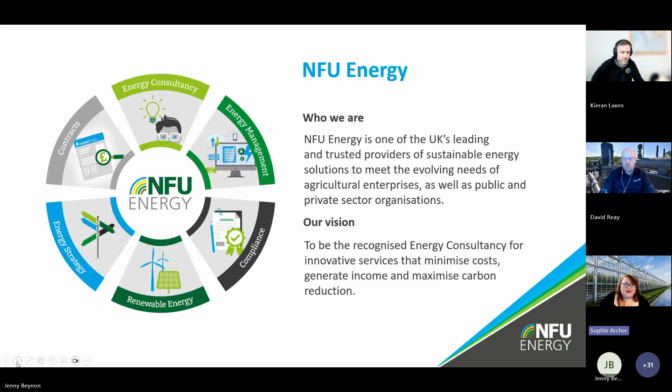Thanks. I have just requested to control the slides, so hopefully they'll come through. While that's happening, a quick introduction to myself. My name is Kieran Laxen, I'm a director at Calico Environmental Consulting. I've only got about 10 minutes to talk, so I'll be trying to cover quite a lot quite quickly.

The focus of the talk will be on AD operations which require permits rather than ones that have exemptions. A lot of it's going to be a super high level overview, in part to tee up the next presentation, so I'll mention some things that will then have more detail later. As with most things, the areas to cover are huge. A lot of the content will be focused on England, where the EA are regulators, but a lot of the concepts also apply to Wales, Scotland and Northern Ireland as well.

Have I got control? I don't think so. Could you do the next slide if possible?

Thank you. So just to say, teeing up stuff, super useful.

Just to mention, the purpose of permits is all about managing risk, trying to minimize it as far as possible, and that needs to consider various different concerns. The concerns are at a local level, considering the impacts on the area immediately around, so that's odor, water, noise, vibration, dust, aerosols, and air quality.

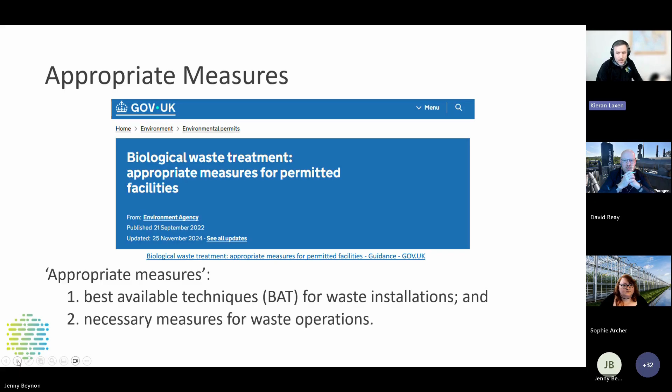Next slide. So what does BAT mean for me, or for an operator? Well, AD facilities are all required to adopt BAT, as we just said, but BAT has a series of emission levels that are required. So for any release to the atmosphere, water, ground, or surface, there are specific requirements that you have to comply with, and these are set out in various different documents.

The most useful ones are the BAT conclusions document and the waste treatment BREF document - these set out the good measures that you want to do. Those are currently hosted for the waste sector on the European websites. They get reviewed and updated periodically, and since leaving the EU, there are UK BAT conclusions slowly working through different documents - the waste treatment sector isn't quite there yet, but in future it'll be UK BAT rather than EU BAT. That BAT document's been around for quite some time now, since 2018.

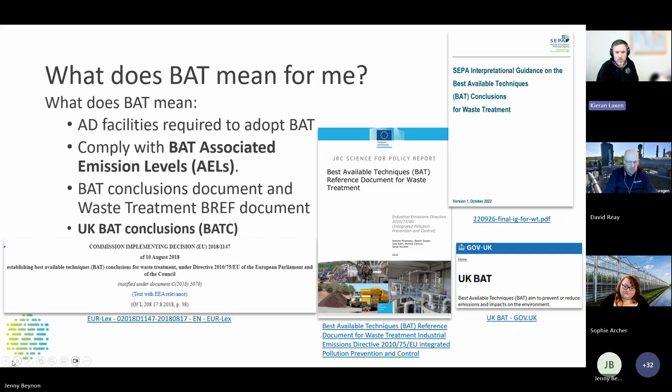There are some other useful documents too, like I've put down there - there's a screenshot for SEPA, the Scottish Environment Protection Agency, and their interpretation of BAT conclusions, which was in 2022. So it's just useful to be aware of what the most recent documents are. Next slide, if possible.

So I thought it was useful to say here, current priorities for AD plants. Now, emission control is obviously one of the big key things, and this covers things like continuous monitoring of methane and ammonia or CO2 emissions. It also covers digestate storage, making sure of gas-tight systems, or implementing advanced flares or biogas upgrading technologies.

Energy efficiency is another key priority for BAT, and this is about optimizing heat recovery, which is definitely highlighted a lot in the BAT conclusions documents.

Then there's digestate management. This is about improving handling and nutrient recovery for systems. When digestate leaves the site, there are secondary effects we make sure we're minimizing, so getting nutrient recovery is important there. There's also a circular economy agenda starting to suggest things like more just-in-time feedstock delivery to minimize the amount of feedstock given on the site.

And then I put down air quality and odor because they're things that tend to need to be addressed in a significant way. There's obviously other things like water and bioaerosols, but those two come up a lot for us.

One of the challenges we've seen, and the reason I put these pictures down, is actually a biofilter, used for odor abatement. The standard emission limits put on those are quite stringent and just generic. But biofilters give off a natural odor as well, so they can exceed those emission limits naturally. Often there's not consideration of how close the receptors are to the site physically, and it's the impact on receptors that matters. So sometimes you have to work to make those more appropriate to the site, but that's the purpose of the pictures.

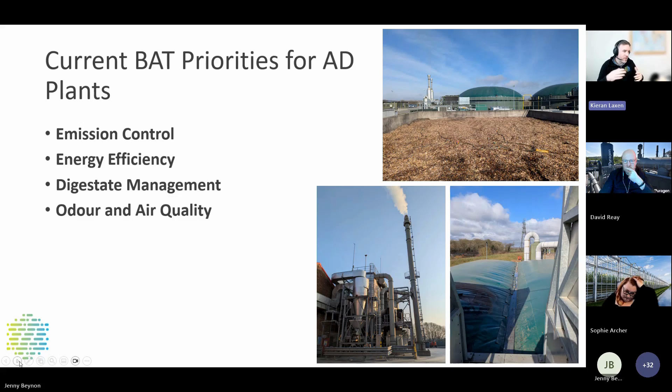Can you go to the next slide?

I thought this was quite a useful thing to mention. I've got a couple of quotes there which I'm not specifically going to read out, but we get asked questions, and for me the useful thing to say is that permitting is useful to consider as quite a binary thing at first. If something's written down in your permit, you can do it. If it's not, assume you can't. My experience is the EA and the regulators are pragmatic, and their objective is to minimize risk, but don't assume you can just do something straight away.

The fun during the permit application stage is that it's often quite a chicken and egg scenario, where as an operator you're trying to convince the EA that you're going to operate a site and it's going to be low risk, and the EA need the evidence to support that. But the details aren't always available at the application stage, so you have this slight chicken and egg scenario. The screenshot on the right is an example of a more bare bones set of evidence that's been submitted, which I personally don't think would convince me if I were a regulator that the facility is going to be low risk. So it's just about making sure when you're doing permit applications or providing information to the EA that you're giving them the evidence to give them all the reassurance they need.

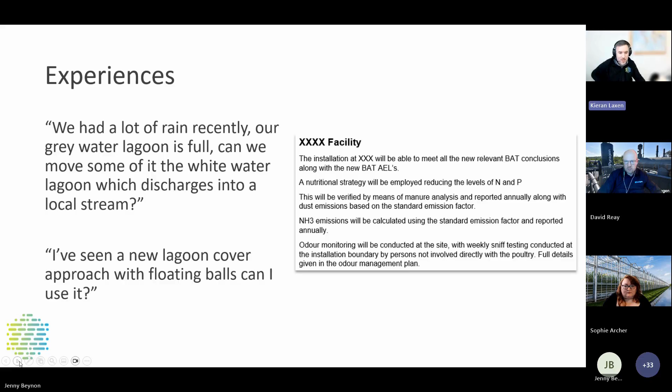Next slide, if possible. So coming on to consultations and updates - I'm conscious some of this is being talked about later, so I'm just mentioning it at this stage. There's a consultation out right now, it came out, I think, two days ago, about the requirement for site conditions reports and updates to guidance on that. This is my point about the goalposts changing - things do constantly get reviewed and updated, so you have to constantly be aware of what's going on.

There's what's called the H1 screening tool, used as part of permit applications to screen whether there's impacts on the environment. This is being updated at the moment and will hopefully come out soon. There's the decarbonisation readiness, which will be talked about later. Then there's standard rules permits - there's consultation on carbon capture storage for those, about whether they can be incorporated into standard rules permits, which would be useful. It's also worth mentioning the Environment Agency are updating the permit application process and management system, and having a new online website, which is hopefully going to become available in the future.

Next slide, if possible. So just quickly mentioning where I think we're going. Obviously hydrogen and carbon capture integration is happening - that's the decarbonisation readiness side of it, a big piece which will be talked about later.

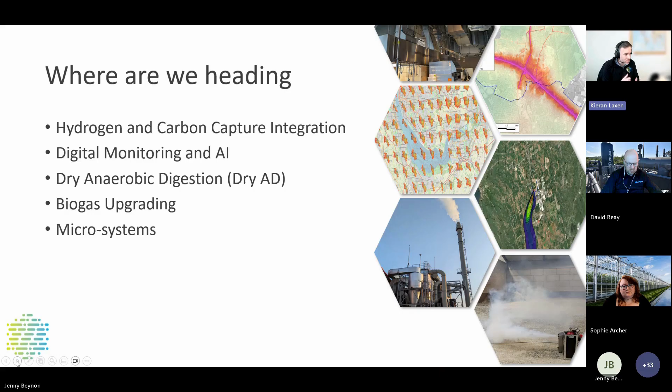That's something I've seen on the R&D side that will probably come through to the operational side as well. There's a move to dry anaerobic digestion, biogas upgrading systems, and the last one worth mentioning is microsystems. We're doing a lot more at the moment helping people where there's benefits in having a larger AD operation, but there's also more smaller ones potentially coming through, so it's worth mentioning that there's both ways we're going.

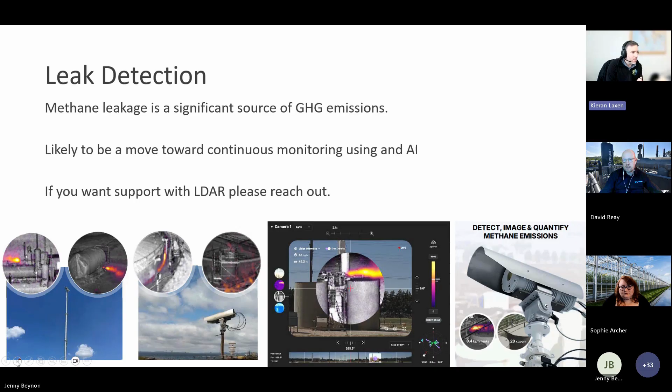I just wanted to mention leak detection. Methane is a significant source of GHG emissions, and I think this is going to be a bit of a focus for really minimising it. The biggest impacts, from my perspective, in terms of climate impacts, are from the leakage, and we work with a monitoring company that are very much moving towards AI and continuous monitoring systems. I think that's the direction things are going, in terms of understanding what emissions are and minimising leakage.

I kind of wanted to express that everything with operating an AD plant requires you to continuously improve and stay up to date - you can't just assume you've got your permit and you're doing the bare minimum to satisfy that. You do need to demonstrate that you are improving and doing the best you can, and there's obviously cost benefits of doing so as well. The links in the slides are there to point people in the right direction for knowing where the information is to keep up to date.

So I think that's the end of what I was hoping to say.

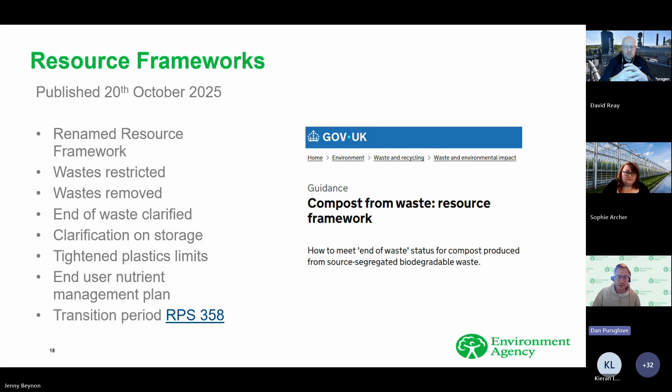The next significant change in the sector is that our standard rules permits currently don't allow the capture and storage of biogenic CO2. We published RPS 255 on this, which allowed AD operators who do biogas upgrading to capture the separated CO2, but we wanted to formalise that, and as part of the decarbonisation readiness work that Emma's going to talk about, we asked to include these changes in our standard rules.

What we're consulting on is adding new techniques to allow operators to do physical separation of CO2 and capture that. It has the same storage restrictions as the RPS - 6 months storage of CO2 and 150 tons at any one time. So it's a reasonable amount of storage for small to medium sites.

Mainly we're doing this because at the moment you have to get a bespoke permit if you want to do carbon capture. So it's off-putting for operators who want to operate standard rules but also want to do carbon capture.

The production of CO2 is not for the purpose of sequestration, it's for the use to be sold into the food and drink industry or other industries who may need carbonation resources. And importantly to note that this isn't a mandatory requirement, so it's a change to standard rules, but it's an optional aspect, so it's not a requirement for companies who operate AD to do carbon capture, but it's to facilitate that within the standard rules.

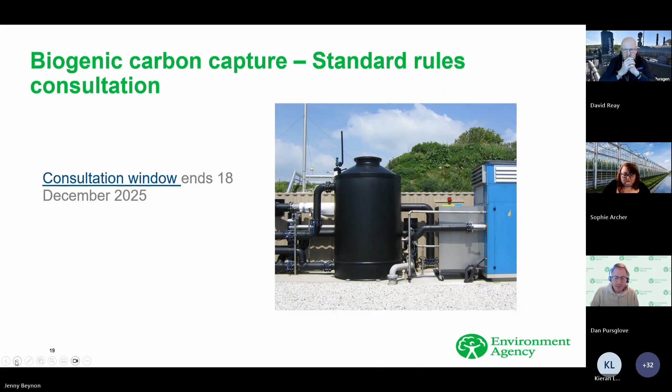DEFRA has consulted on modernising environmental permitting, and that covers a really broad range of aspects that Kieran touched on a little in his talk. But the key bit for you listening will be the proposal to bring crop-fed and non-waste AD into environmental permitting. So there'll be a regulatory legislative change to the environmental permitting regulations. That would likely be a Part A1 installation activity.

We definitely support this because the risks from AD facilities are similar regardless of feedstocks. You may have slightly different environmental challenges with different digestate, but they both still produce biogas. They both, if you spill digestate into a river, it's going to cause pollution. So we're pleased that it's being brought into regulation, hopefully.

Many non-waste AD activities probably take place at capacities below the 100 tons per day threshold, which is the current capacity size for a waste installation. So we've fed back to DEFRA that we'd like to see smaller capacity non-waste ADs covered by these reforms as well. That consultation unfortunately closed on the 21st of October, but hopefully some of you may have seen it from other sources.

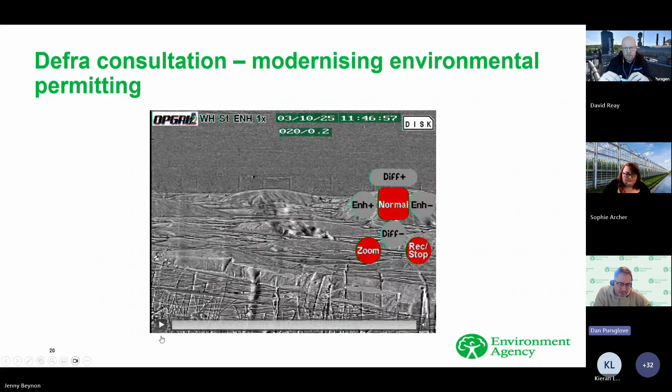Non-waste sites need to be considered on a par with waste. So amongst all the graininess, you can see bubbling in this digestate lagoon and venting of biogas, which poses a serious environmental health and safety risk. And that is currently completely unregulated.

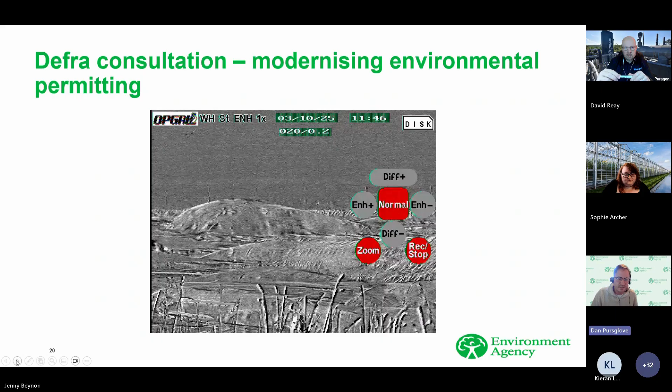Biogas leakage, expanding on the last point and on what Kieran said, the key and probably the biggest priority for us in AD is biogas losses, and it can occur from dome membranes, incorrectly operated pressure release valves, open digestate storage, leaks from flanges and pipework.

Some of you may be aware that DESNZ produced a document called the MEAD report, which stands for methane in anaerobic digestion. That was last year, and it included a study which assessed methane leaks from AD. Most of these case studies were from agricultural plants, so crop-fed, manure or a mixture. And it found that losses of methane ranged from between 4.1 and 14.2% of the methane produced in those 8 individual AD plants.

Biogas is invisible. Operators won't know it's happening. So Jenny, could you press play, please?

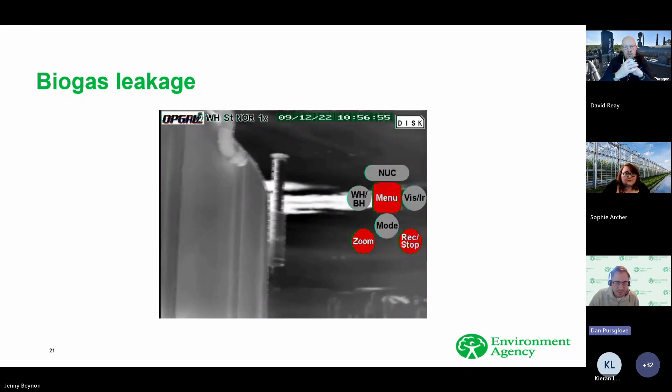Just to highlight some of those losses, this is methane emissions using, again, an OGI camera, leaks from pressure release valves, which have inappropriately been activated while the CHP was down. So these sort of gases should be going to the flare in these emergency situations rather than venting out the top of the tank. There shouldn't be any venting of gases when it's not safety critical, but sometimes without the sort of leak detection and repair checks, you don't know that this is happening.

And it can be quite significant losses of biogas, which is a loss of revenue. At the end of the day, it's a loss of what you're doing the AD for, to generate a gas that you can combust, burn it, get the electricity, and even upgrade the gas into the grid.

So yeah, just to re-emphasize the importance of the leak detection and repair aspects of the permitting. And even if you operate a site which isn't regulated at the moment, doing the leak detection and repair aspects would be very good practice for you to prevent losses of methane. And that's it for me.

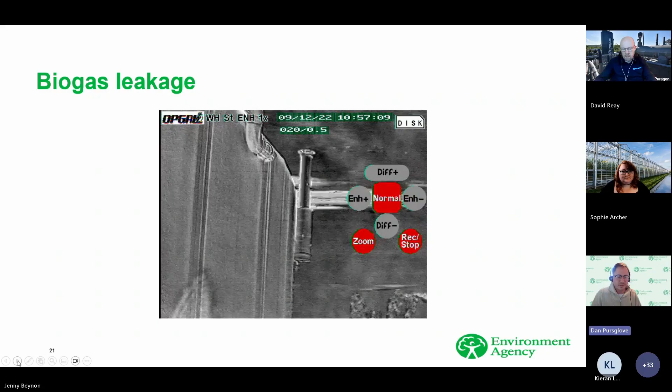Thank you. Good morning, everybody. My name is Emma Preston. I'm a senior advisor and project manager, and I'm responsible in the Environment Agency for the implementation of regulatory controls relating to medium combustion plant and specified generators. It's a very big and complex topic, and I think I've only got about 5 minutes left, so bear with me. I'll try and trot through this as quickly as possible.

I think the key thing I want to get over is to highlight to you the relationship between use of biogas as a result of doing AD activities and in combustion plant, which often follows that activity, and just make you aware of what those requirements for permitting and compliance are. So we'll just move on to the next slide, please.

So the requirements for controls on emissions from medium combustion plant comes from the Medium Combustion Plant Directive, and that was then enacted into law through environmental permitting regulations. It requires medium combustion plant and specified generators to be permitted. So this slide is talking about specifically medium combustion plant and which ones of those would require a permit.

So if you've got a plant that's got a capacity of more than or equal to 1 megawatt thermal and less than 50 megawatt thermal, burning any fuel, in this case most likely biogas, then it would fall into the requirement for a permit. Those operations can be static or they can be mobile plant. They can include backup generators for emergency use.

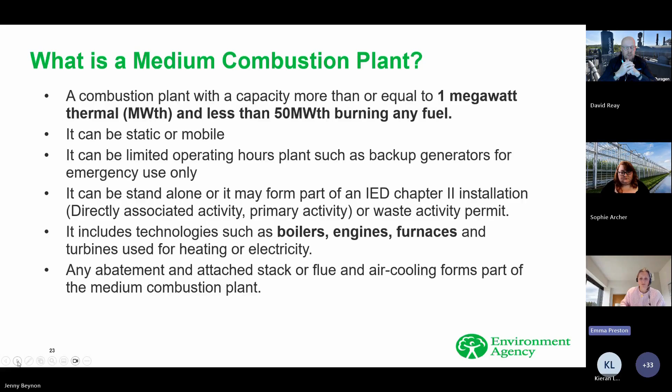So the sorts of combustion technology we're talking about here, probably with AD, mainly boilers, engines and CHPs, which is the combined heat and power. And sometimes they're for heat and sometimes it's for electricity. Any abatement that you've got associated with that, stacks, flues, air cooling, that all forms part of the medium combustion plant that we're looking to control. We'll just move to the next slide, please.

So who might need a medium combustion plant permit? I've put up a number of different questions. This is quite complicated, but first of all, I would recommend that you determine whether you would actually be excluded from the requirements. For example, if you're only burning poultry litter, they are excluded, or if you're doing direct heating and drying, there's exclusions that apply in those cases.

It's also a good idea to work out whether your plant is new or existing. If it was installed before the 20th of December 2018, it's what we call existing plant. And if it was after that date, it's new. If you substantially refurbish your older plant, and there's definitions of this on our website, you may then start to become a new medium combustion plant. So it's worth watching out for that.

Understanding what your capacity is really important. We use input capacity in megawatt thermal using net calorific values, so input capacity rather than output capacity. That's a common mistake that's made. So if you're not sure, you can go to the manufacturer of the combustion plant to determine that. Sometimes it's on a nameplate. There's various ways of working out that, and we've got some guidance on that on our website as well.

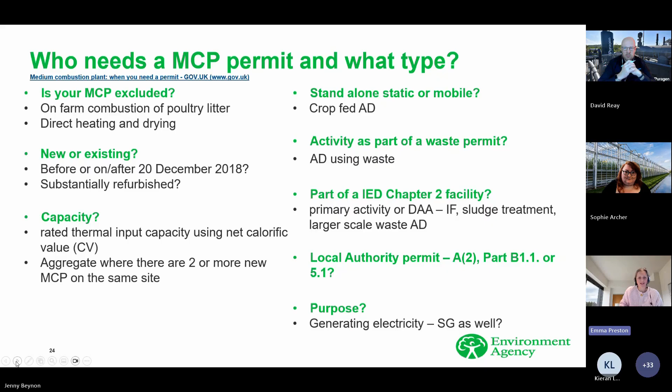What's important here is whether your medium combustion plant is generating electricity or not, because you may also be a specified generator. I'll now explain what a specified generator is. These are combustion plants that generate electricity.

If you're a combined heat and power plant, that would also be considered a generator. But if you were just doing heat, you would only be an MCP. It can be one generator, or a group of generators at the same site, by the same operator, for the same purpose.

The difference with medium combustion plant is that the de minimis is different. It can be anywhere above 0 megawatt thermal up to 50 megawatt thermal. So this can kick in for smaller generators than when you're just a medium combustion plant. Hopefully that makes sense.

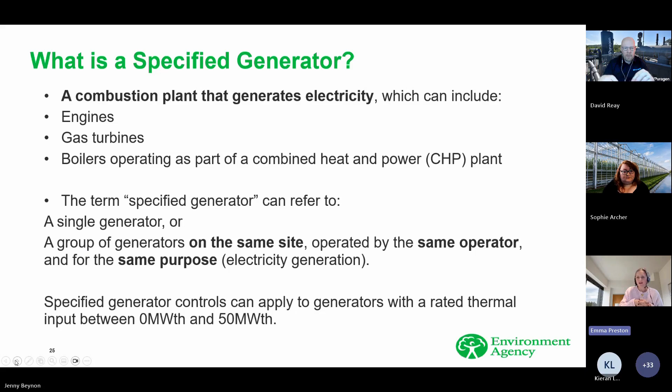In terms of deciding if you need a specified generator permit in addition to the medium combustion plant one, or instead of it, first there are questions around whether you're actually excluded. Again, emergency backup is excluded. If your activity is taking place in an IED Chapter 2 facility, then the requirements of specified generators form BAT instead of you needing that activity permitted as a specified generator.

Again, you need to work out your capacity. It matters exactly when you got your capacity market agreement or FIT agreement. The number of hours that you operate and your NOx emissions all determine when, or if, you need to apply for a specified generator permit. I've put a link on that slide that goes to our guidance, which talks you through these questions in more detail, but that's the high-level information you'd need to determine whether you need that permit or not.

So who are we? We've been around for over 35 years, based in the UK. You may know us as CPL Activated Carbons, but we've grown rapidly over those years, making acquisitions in different countries. Now we have operations across 9 countries, and we're basically a global leader now with revenue of €100 million globally. We've grown from very humble beginnings in a little office in Wigan to a global player, just to let you know who we are.

So what is activated carbon? It's basically a pure form of carbon with a very high surface area. We say a dessert spoon has a surface area of 1.5 football pitches, and you can see it's made up of those pores, shown on the top right there.

Different raw materials, coal, coconut shell, wood, give you different properties for different applications, and different physical forms as well. You might be familiar with granular, GAC, powder, or pellets. Typically for gas phase, you'd have the large GAC or the pellets shown at the bottom there. It works by trapping impurities in those pores, a process called adsorption, and generally that's a reversible process that allows us to recycle the carbon, which we do here in the UK.

There are hundreds of applications: water, drinking water, wastewater remediation. On the gas phase, you've got odor control, biogas purification, VOC abatement, respirators, lots of things. Specifically for biogas and biomethane, you've got two broad types: siloxanes and VOCs, your organic pollutants, which use standard GAC or pellets. Then for your inorganics, hydrogen sulfide and ammonia, we tend to impregnate the carbons with functional chemicals because those impurities aren't very readily removed by standard carbons.

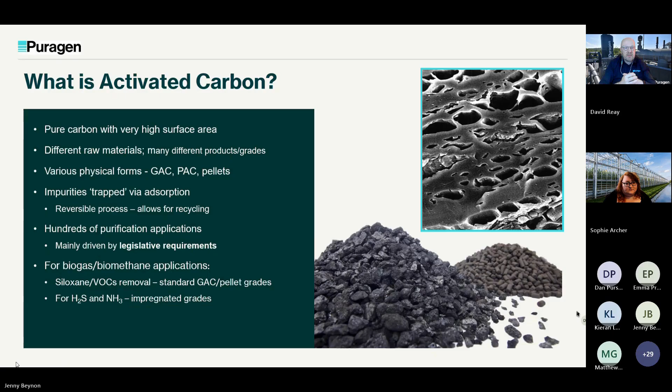So how do customers use carbon? Increasingly they look to our range of mobile carbon filters, which we design and manufacture in-house at our site in Chesterfield. AquaSorbers for liquid phase and VOCSorbers for gas phase range in size from small drums, shown on the far right, up to our largest 30 cubic meter truck-based solutions, shown in the middle next to a biogas dome. They give customers a convenient plug-and-play solution. We deliver the filter full of fresh carbon, and when it's spent, we replace it with a replacement filter full of fresh carbon and take the spent away for recycling.

Obviously, there's no on-site carbon handling. You don't have a pile of black granules that might be smelly, dusty, or even potentially flammable if it's had biogas through it. So we take that away and we handle all the carbon at our service centres.

And it's obviously modular. You can add multiple filters in series or in parallel. If there's a spike in, for example, H2S, you might want to add a second filter specifically targeting H2S. Or at a landfill site, if the gas volume goes down, you might want to take away one of multiple filters. We rent the filters to our customers, so it's essentially a CapEx-free option. And it opens the door to our change-out service, which I'll talk about on the next slide.

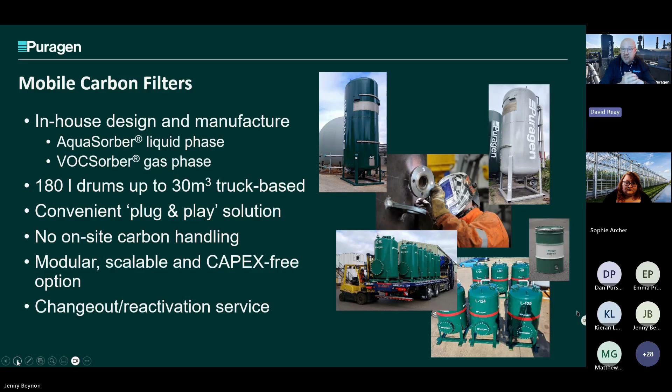Wherever possible, we recycle our spent carbon. The main reason for doing that is a huge carbon footprint saving. With coal-based carbon, it's about a 93% carbon footprint saving.

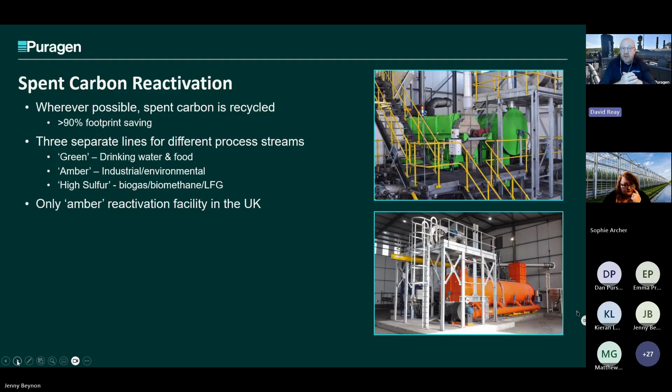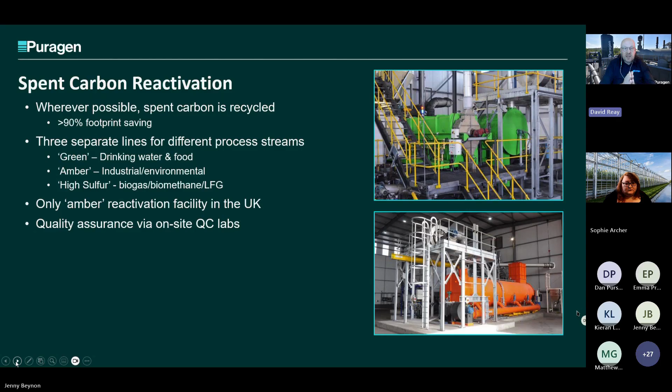We have three separate processes at Immingham. We have a green list process for drinking water and food, which is completely separate to our amber list process for industrial and environmental - that's your odor control, your VOCs, that type of thing. And we have a very specific third process looking at high sulfur carbons coming back from biomethane, biogas, and landfill gas. Important to stress, we are the only amber reactivation capability in the UK. Anyone else taking spent carbon from you will be either disposing of it or sending it overseas for treatment. And we have on-site quality labs for QA as well.

So, what is the problem with high sulfur? When it's heated in a standard reactivation kiln - that's our big amber kiln, one of the biggest in Europe, but it's here in the UK - it basically dumps elemental sulfur everywhere, and that's a big problem when you've just spent several millions of pounds on a reactivation kiln.

The second stage, the orange thing next to it, is a thermal oxidizer. In the presence of oxygen, it forms sulfur oxide, SOx, which is a toxic and hazardous gas. Spent carbon is also moist, coming from biogas streams, so you can form sulfur-based acids, sulfuric acid. So you've essentially got hot acid rain sloshing around a multi-million-pound kiln. For all those reasons, our industry has traditionally not wanted to touch high sulfur carbons.

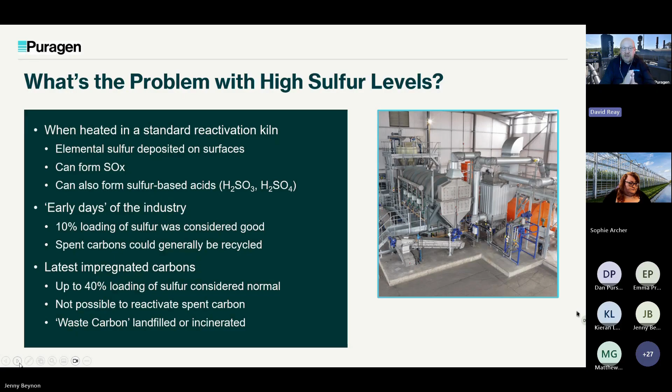Rewinding a bit, in the early days, you might get 10% loading of sulfur on a spent carbon - that was considered a good performance. At those levels, our industry could traditionally treat spent carbons, blending it with other feedstocks to cope. More recently, with the latest impregnated carbons, we're seeing up to 40% loading on sulfur. That's quite normal - at that level, 100 kilos of spent carbon gives you 40 kilos of sulfur. At that level, you have to treat it as waste, and our industry has traditionally landfilled or incinerated those kinds of spent carbons. So that's the problem.

Next slide is our solution. After an extensive R&D program, we can now safely and economically handle these heavily loaded spent carbons. 40% sulfur loading is possible, and we're doing that on an industrial basis - it allows us to process carbon that was previously considered waste.

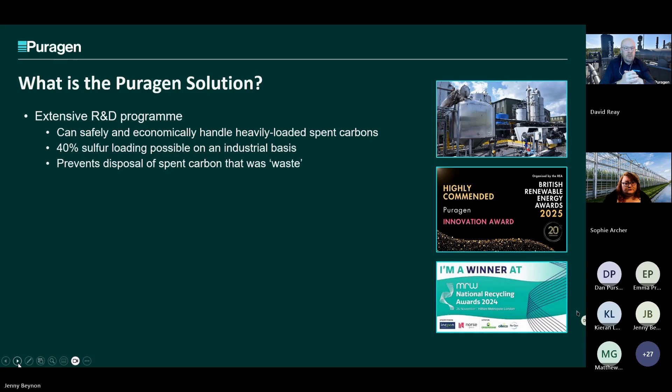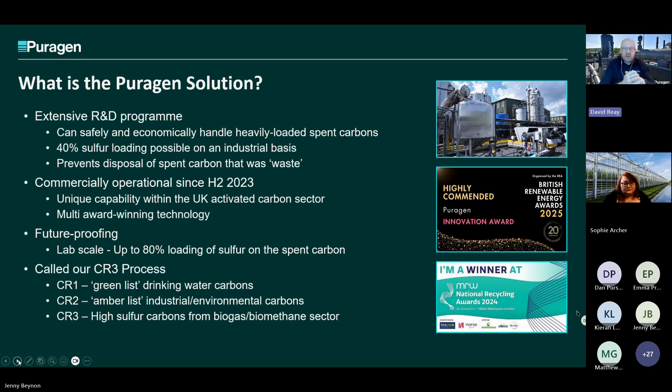We've been operating this process since the second half of 2023, and it's a unique capability within the sector, certainly here in the UK. We've won multiple awards for our technology, and we're very proud of our technical leadership in this area. We're not standing still - we're trying to future-proof it by looking at 80% loading of sulfur, and we're able to do that on a lab scale. Hopefully we can do that on a commercial scale going forwards. This forms our third process: green, amber, and then CR3, carbon reactivation 3, specifically for your sector, for biogas and biomethane.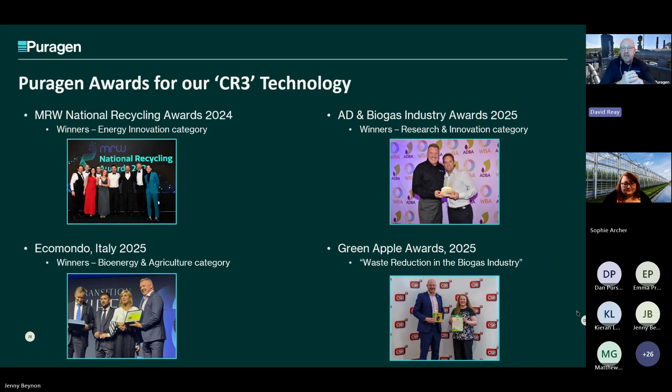We won one in Italy earlier this month, and last week I was at the House of Lords picking up another award, a Green Apple Award for this technology. So we're getting the message out there that we have a solution.

A couple of very quick case studies. We retrofitted where a customer hasn't previously had carbon, but it allows us to show our full engineering prowess. This was a landfill gas site where they had problems with siloxanes and hydrogen sulfide. The siloxanes were linear short chains, and that's a particular issue.

So we installed 2 of our 2 cubic meter VOCSorbers, plus all the pipework and connections. Again, we can supply the full engineering package. We offered coconut carbon for the shorter siloxane removal, specific carbon for a specific problem, and impregnated coal-based carbon for hydrogen sulfide. Two carbon filters for 2 solutions.

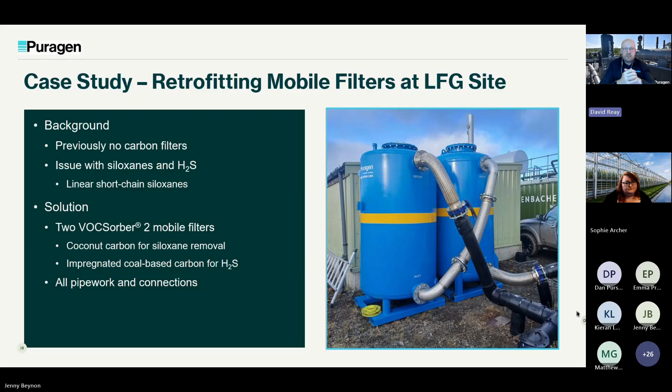Next slide, please. This is a much bigger scale biomethane site.

The OEM for the biomethane solution did provide some small plastic carbon filters, but they were insufficient for the hydrogen sulfide levels they were getting, and they were changing the carbon out every 3 to 4 weeks with downtime, basically having to turn the biogas off. And as you know, if you're not pumping biogas, you're not making money.

So our solution was we added one of our largest filters, a VOCSorber 30. We initially had 2 units, later reduced it to 1, and now they're changing out every 6 months with 0 downtime. We've arranged the pipework so that they can bypass the carbon filter through their fixed filters. There's no downtime - they can keep producing the biomethane and keep making money. That's how we work with customers in a partnership approach, trying to solve problems and improve their outputs.

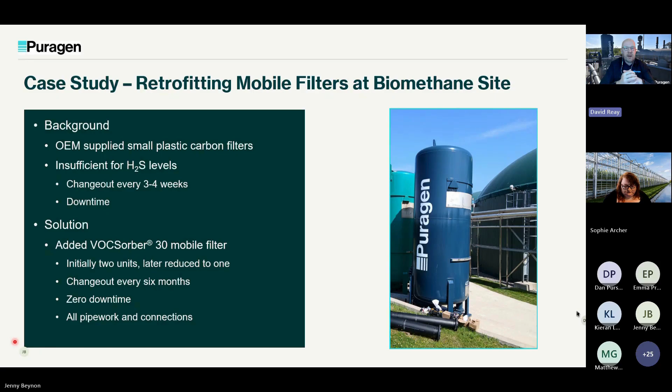Next slide, please - I think it's the final one. In summary, we want to be a one-stop shop to help customers solve their challenges. We have our activated carbons, our VOCSorber filters, our REACT-Sys recycling program, and all the support in terms of engineering, site services, quality control and application support.

We believe we've shown technical leadership in terms of activated carbon purification and recycling with our award-winning CR3 high sulfur process. What does it give biogas operators? Operationally, it solves this age-old problem of what to do with the waste carbon. Environmentally, it improves the credentials of your site. And financially, you're not paying for disposal of hazardous waste. We have a no hidden fees policy as well, so we don't hit customers with surcharges if the spent carbon is more tricky to handle than expected.

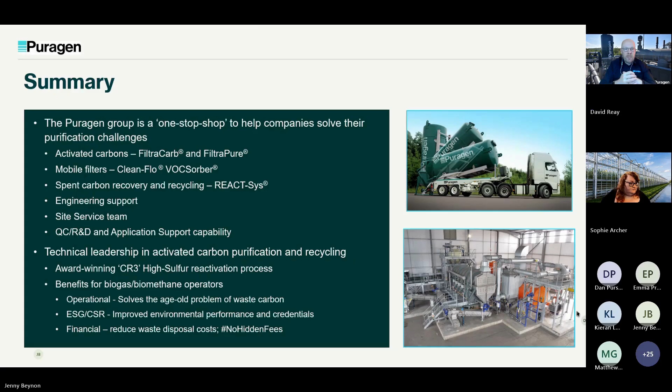Final slide, please, Jenny. So thank you for your attention - again, that's a bit of a rush through. Please contact me, and my colleague Matt Goff is our biogas expert, he's with me here as well. Please come back to us if you want any more details, if we have projects you want to discuss. I'm happy to take questions now. So thanks again for your attention.